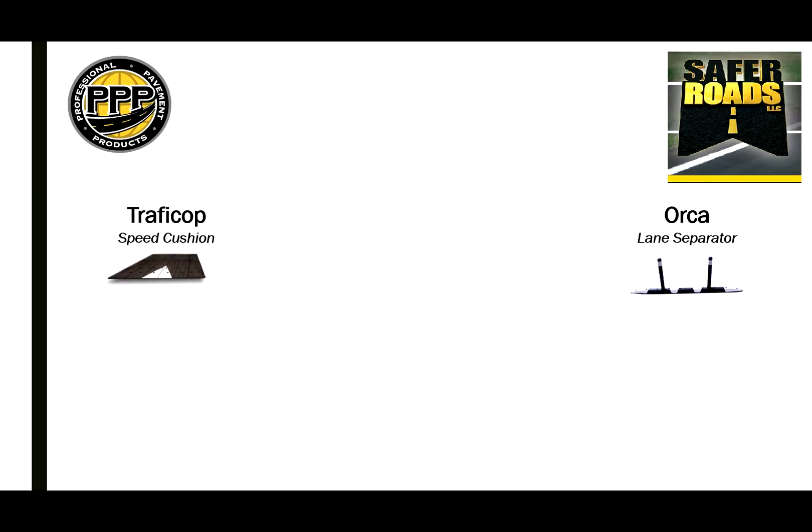Safer Roads has 3 primary products within its line: the Traficop Speed Cushion, the Orca Lane Separator, and the RediPave Modular Median. Although these 3 products serve very different purposes, they do have 6 things in common.

First is that they're all modular, meaning that they're versatile and easy to transport and install. Secondly, they are all made of 100% recycled rubber buffings, improving the durability, wear, and safety.

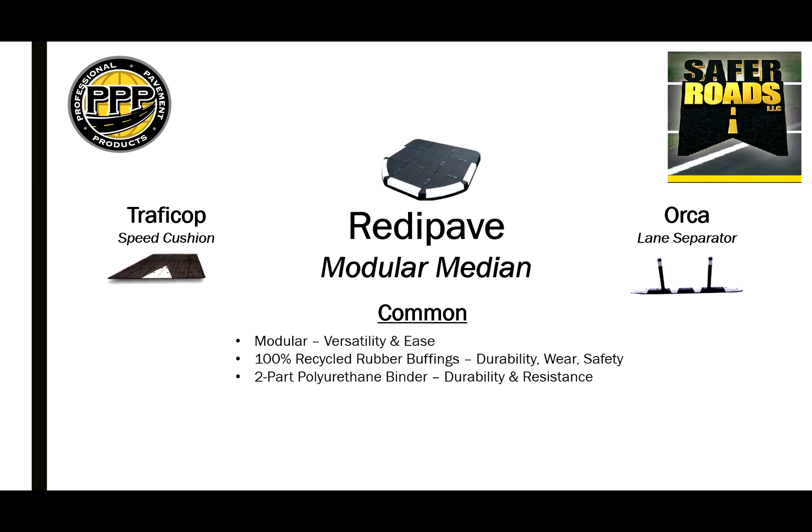Something worth noting here is that these are not made of crumb rubber from recycled vehicular tires. They are actually made exclusively from the far more durable and less caustic tread of truck tires. This rubber is then blended and permanently bound by a 2-part polyurethane binder, again improving its durability and resistance to weather, wear, and chemicals that exist in the roadway system.

Next, this mix is compacted by a 160-ton press, again improving its durability and the density of the module.

All Safer Roads modular products are anchored with a stainless steel anchoring system that holds the modules in place for longer durability and ease of installation. Lastly, a quick-set polyester resin is used in the anchoring system to prevent vibratory crawl-out of the anchors as seen in many other products. The resin also provides a seal, preventing water intrusion into the pavement base, providing durability, stability, and a longer useful life.

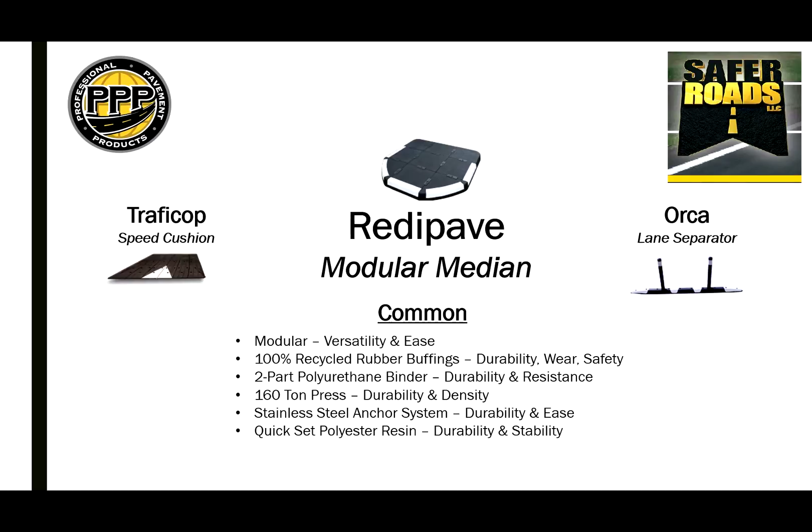Although the modular median has been used in Europe for several years, it was just introduced to the US market in late 2016 on a project in New York City.

So how can we stand behind the statement of durability? We can do this by examining the durability of its sister product, the Traficop, that has been sold in the United States for over a dozen years.

The first image is of the Traficop Speed Cushion that was installed in Margate, Florida. This picture was taken after 12 years of use.

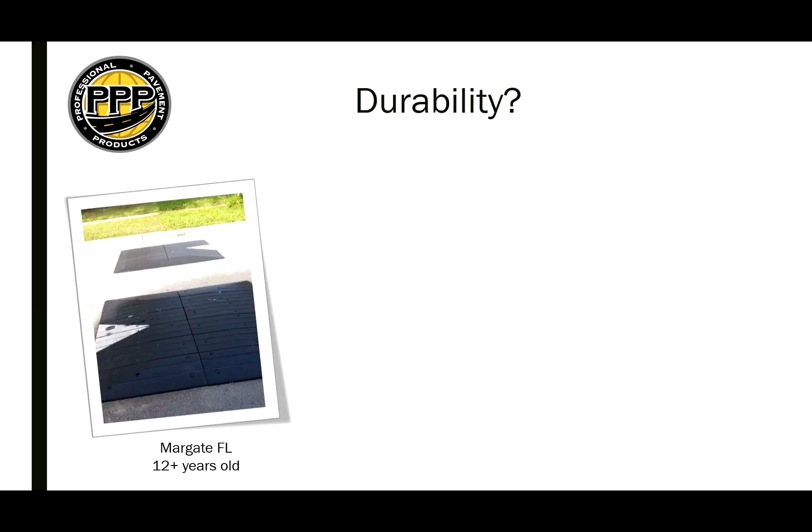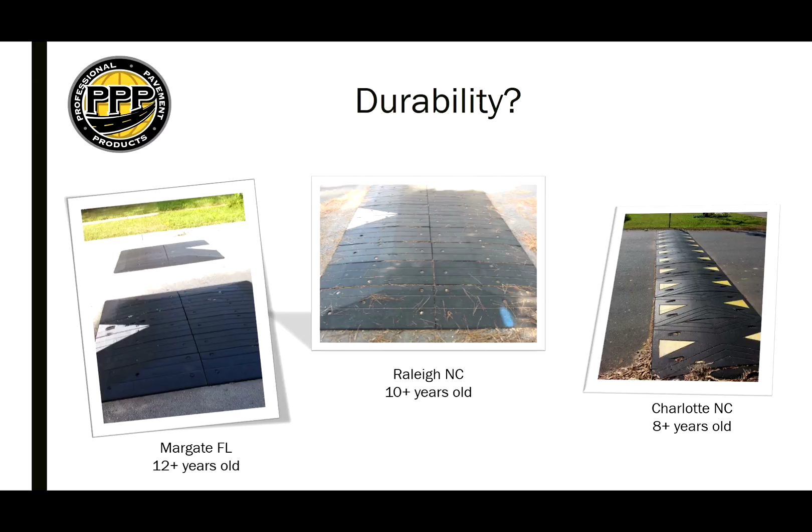Next is the installation in Raleigh, North Carolina from 10 years ago. And this is the Traficop installed 8 years ago outside of Charlotte, North Carolina.

I want to zoom in on this image for 2 reasons. First, notice the lack of wear on the surface and even on the markings after so many years of vehicular impact and weathering. Second, note the seam in the middle.

See how straight it is? Other products of this type tend to shift under the constant impacts. As a result, the center seam would become distorted.

As you can see here, after so many years, the Safer Roads installation process and hardware prevented this from being a problem, providing for a long, effective life of all of its products.

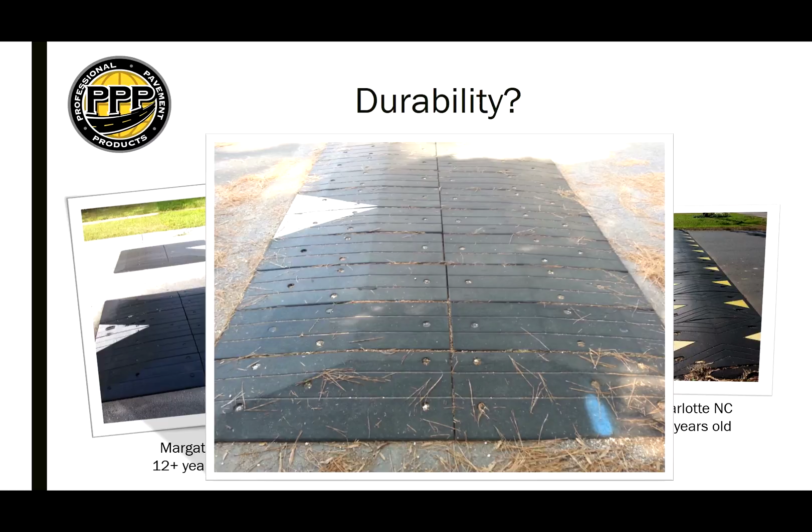Now let's look at the star of our study, the modular median. There are two primary purposes of the modular median. First is to build an effective, durable, permanent, or seasonal median rapidly. Second is to improve the safety and protection of pedestrians, motorists, and even cyclists.

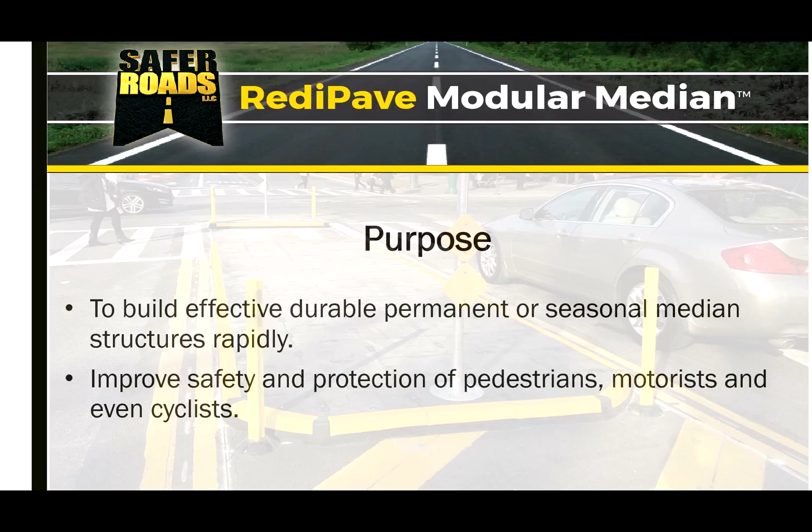As previously stated, the modular median begins with recycled rubber buffings, then with a two-part polyurethane binder, and compressed with 160 tons of pressure, creating the modules. These modules of different types are then assembled together, creating a complete median in a matter of minutes.

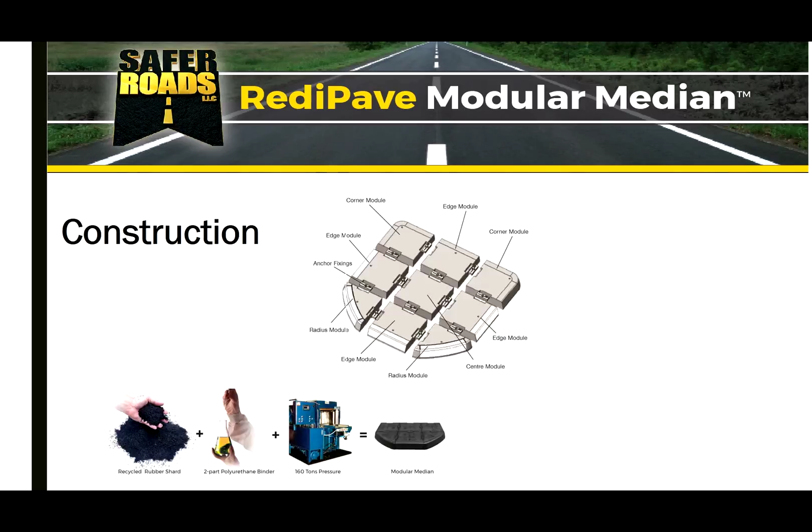The modules are fastened together into the pavement by the use of a durable polymer anchor block held down by stainless steel bolts into the exclusive RediPlug pavement anchor, providing a safe, secure device for managing your traffic and protecting your pedestrians.

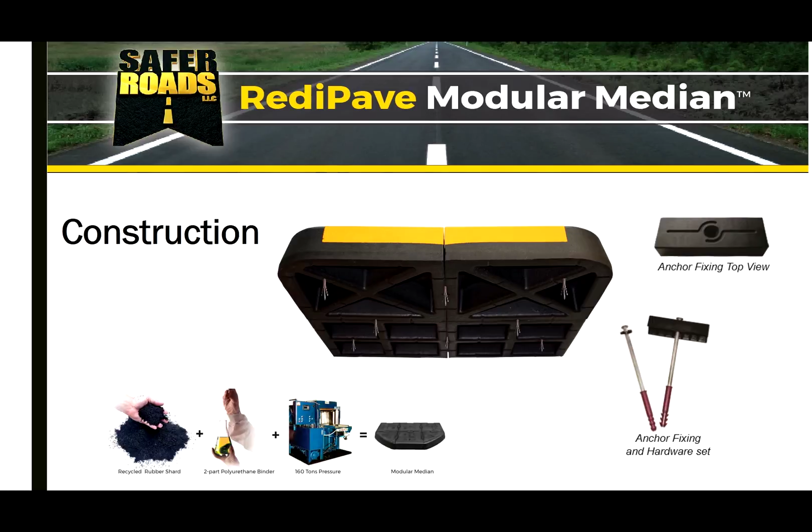All right, now let's move to our 3 case studies. First is the New York City Department of Transportation.

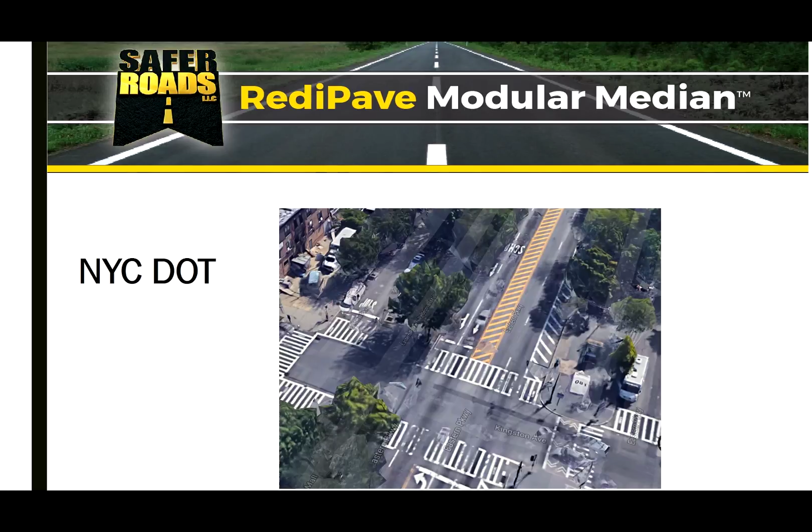In this case, the need was to provide a pedestrian refuge on this multi-lane roadway. But here's the hook. This roadway is also on the route of one of the largest parades in the United States, the New York City Labor Day Parade.

Their goal was to create a pedestrian refuge that first would be durable and effective throughout the entire year, even the winter months of plowing, but second, to be easily removed and then reinstalled before and after the parade. This was the first time that RediPave modular median would be used in the United States.

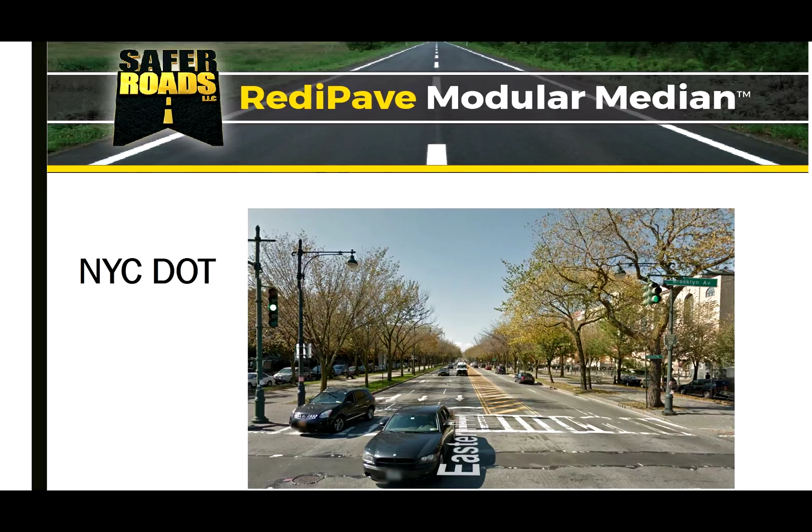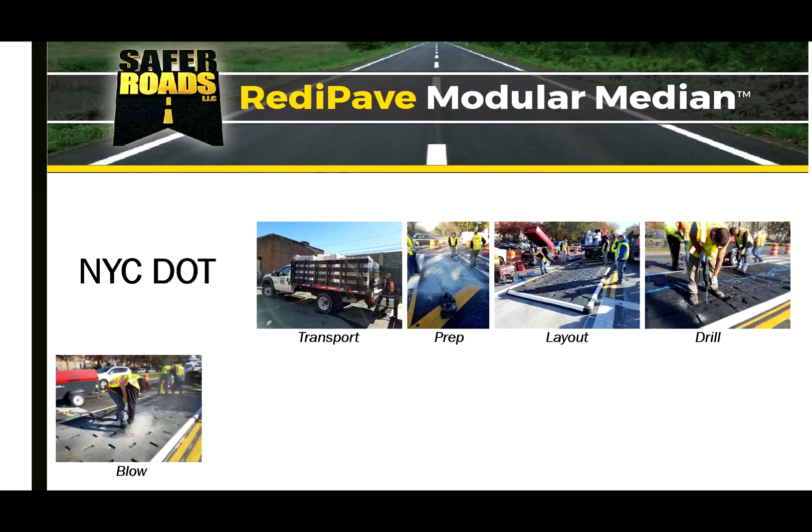The RediPave modules and hardware for 2 large pedestrian refuges were loaded and transported on a single stake bed truck. We prepared the surface by sweeping and ensuring a relatively flat surface. Then we laid out the median modules and drilled the anchor holes, blew the debris out of those holes, installed the resin, and set and drove the anchors.

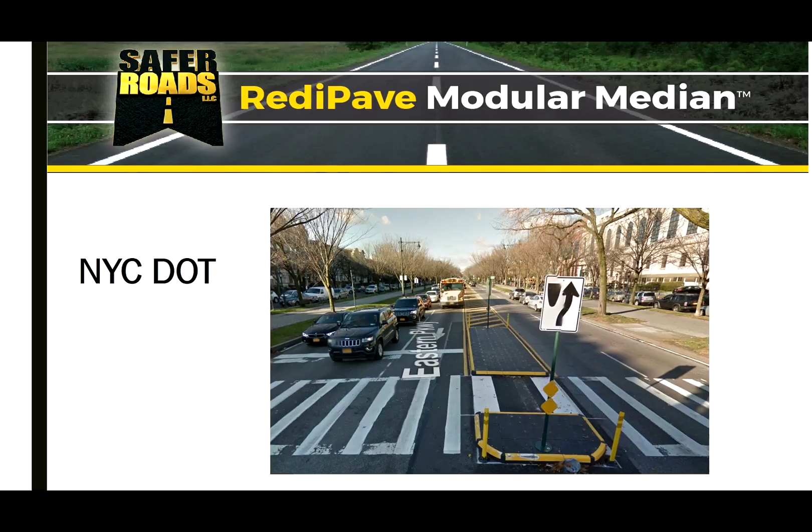And in only a few hours, we went from this to this. On this project, we were able to install this 2-piece 26-foot by 8-foot median in less than 4.5 hours.

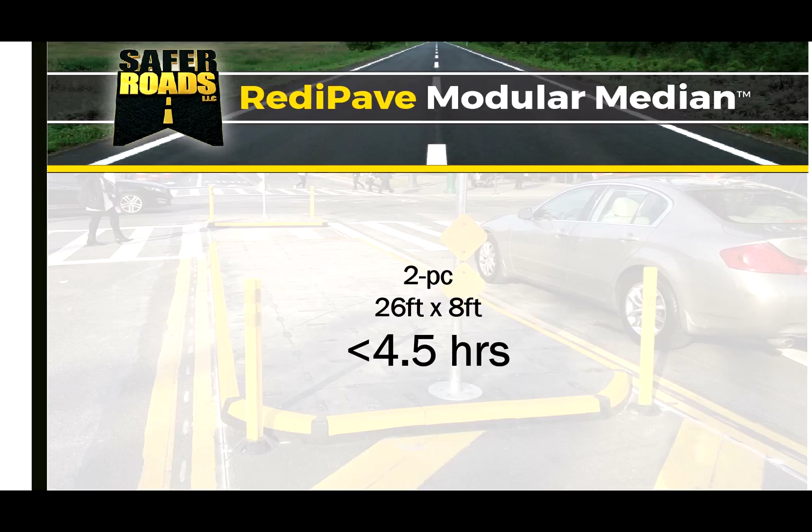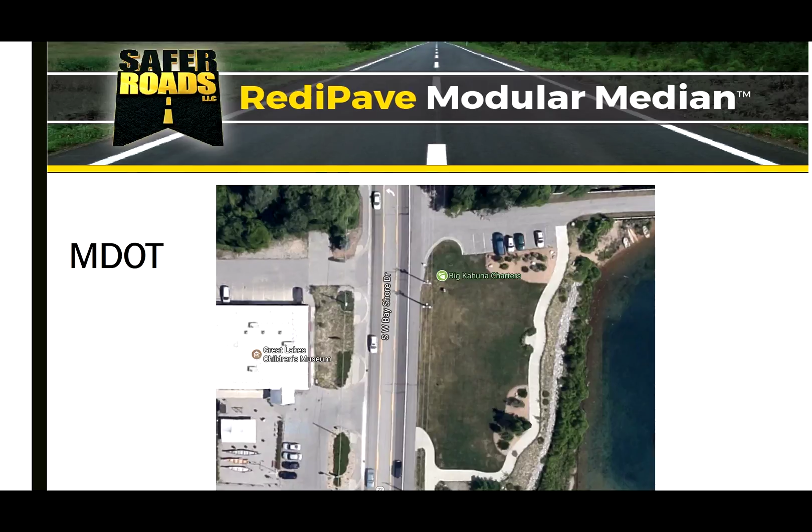Next was Michigan DOT. Here they had a multiple lane roadway in front of a children's museum across from a public park. There was concern of the children and their parents crossing the multi-lane roadway to go from the park to the museum and back. This is a major route in Michigan and is normally plowed at high speed in the wintertime. Building a conventional concrete median was not possible due to the concern of damage to and by the plows.

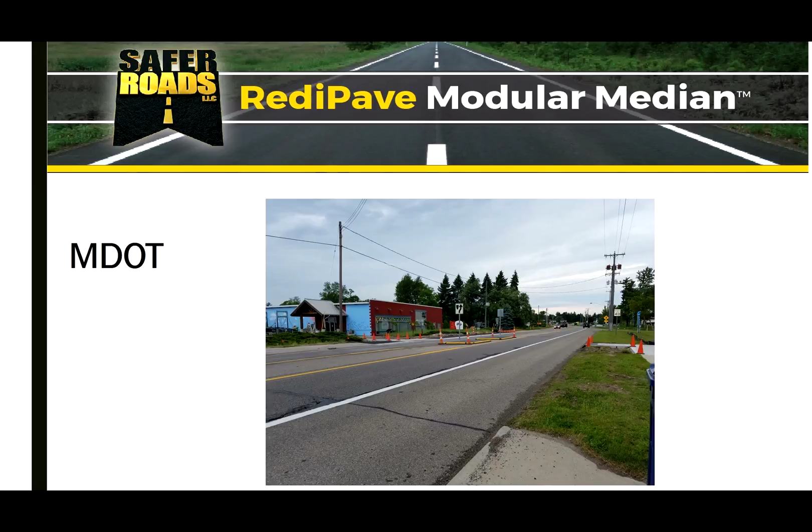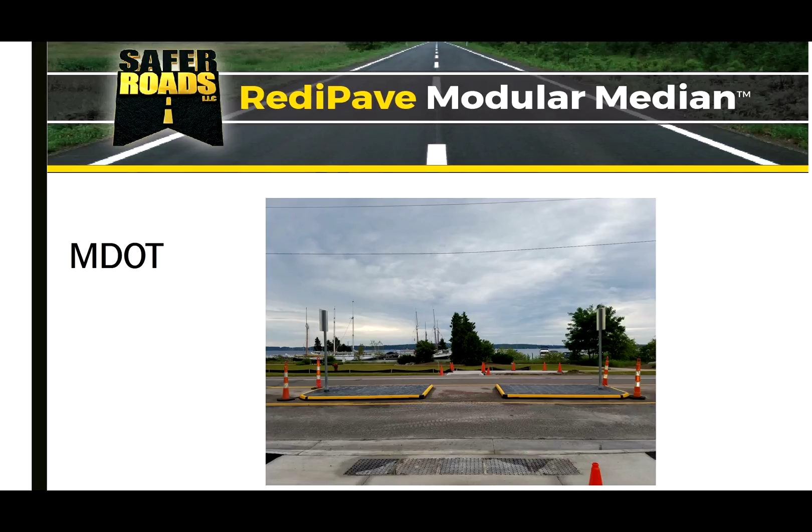It was decided to use the RediPave modular median as a seasonal mid-block pedestrian refuge. This way, it could be put in place during the tourist season and then removed for plow season. The installation and its effectiveness was a complete success. Now the parents and their children can safely cross the multi-lane road without playing a deadly game of Frogger.

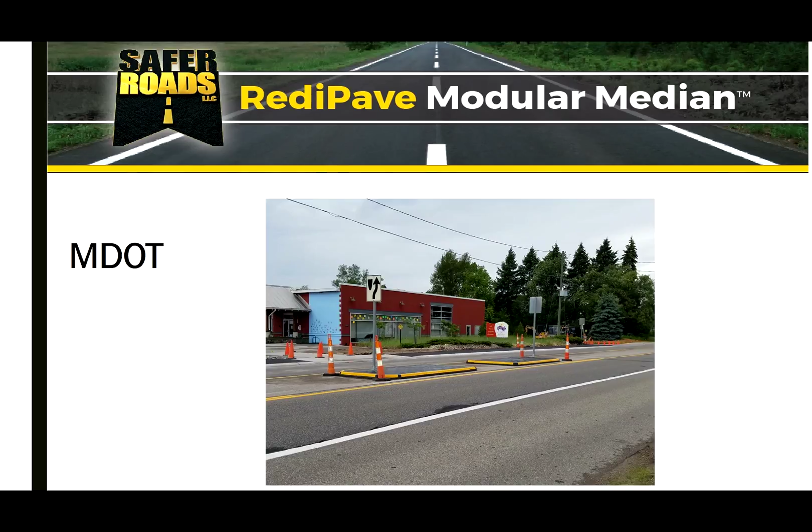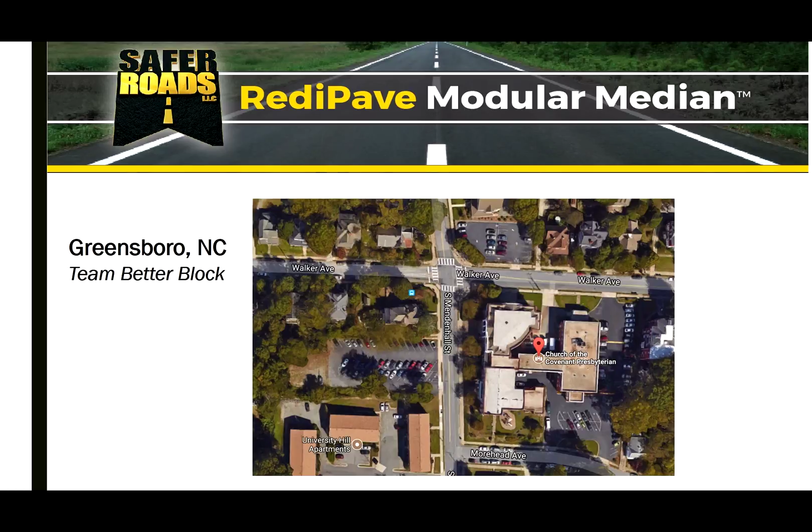The third mini case study took place in Greensboro, North Carolina, through an organization of Team Better Block. Team Better Block is dedicated to reclaiming cities for the public good, one block at a time. On this project, Team Better Block utilized a number of Safer Roads and Alert Brands products in an effort to bring traffic speeds in compliance and to create a more pedestrian-friendly environment in this university area.

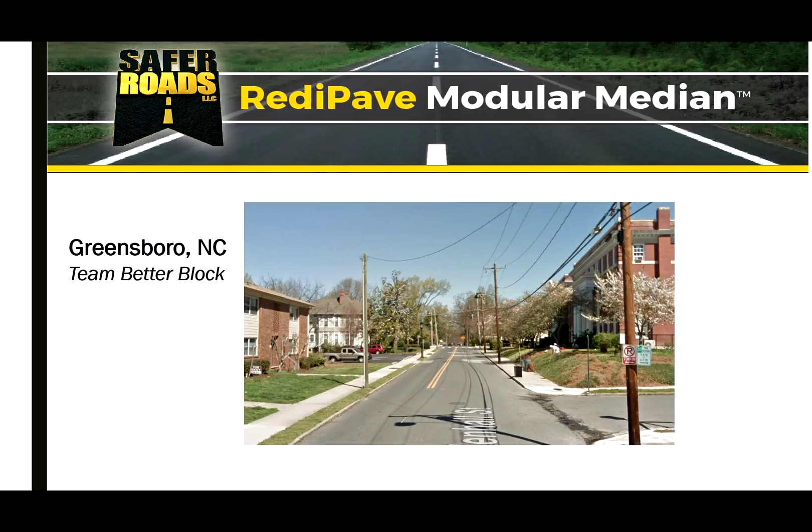Using the Safer Roads and Alert Brand line solutions, including the Alert Brands Median Alert and Flexible Delineator Post, and the RediPave Splitter and Modular Medians, all to create pedestrian refuges, traffic management chicanes, and chokers. Post-study results show an impressive 95% speed compliance.

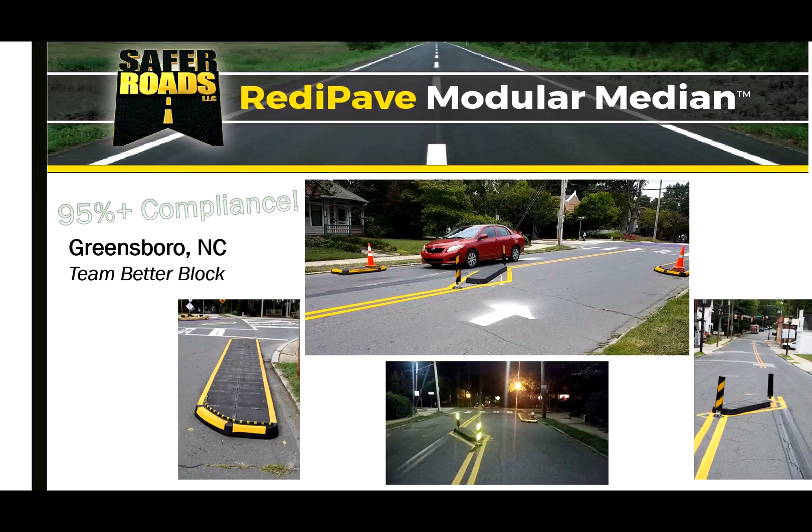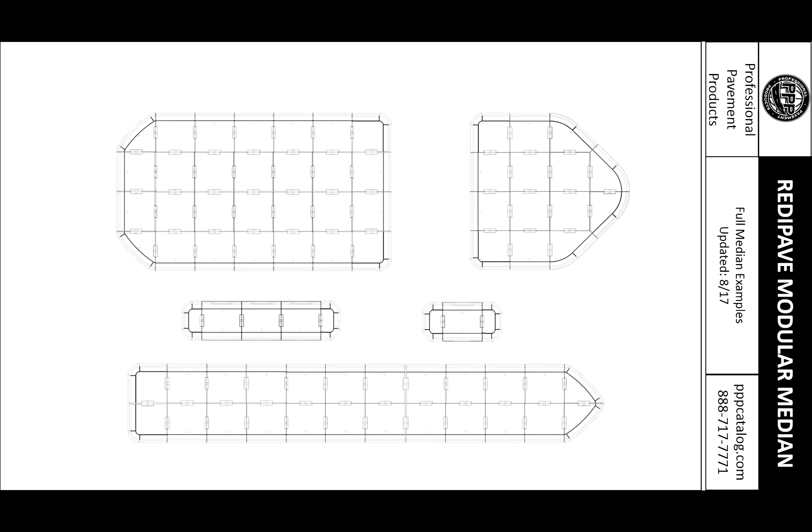The RediPave, being a modular device, provides for many configuration choices and designs. The RediPave modular median and splitter come in 9 module types, such as edges, corners, centers, radiuses, and more. These modules are combined to create full medians of various widths and lengths.

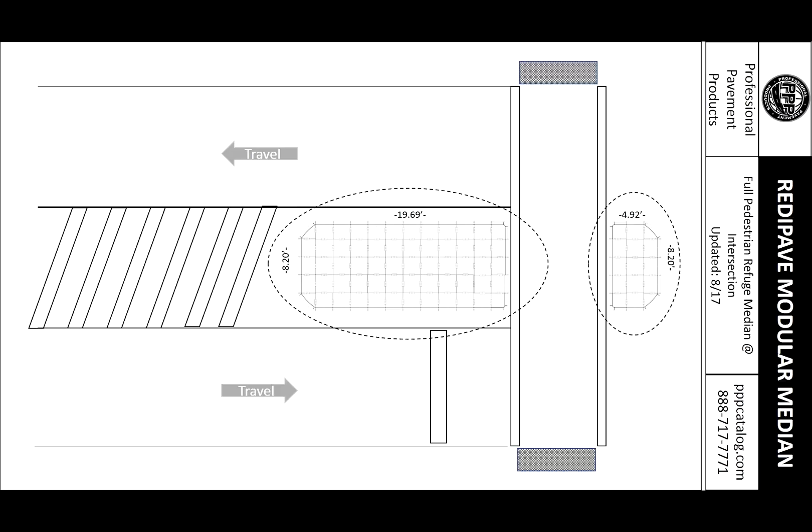Various styles of median end treatments, small medians and roundabout centers, and parking and pedestrian bulb outs, just to name a few. These configurations provide an agency with a list of design options, like an intersection full pedestrian refuge and median, a pedestrian curb extension or bulb out, a parking curb extension or bulb out, a 2-lane slow point or a choke, a traffic diverter or chicane, a mini pedestrian refuge for narrow roads.

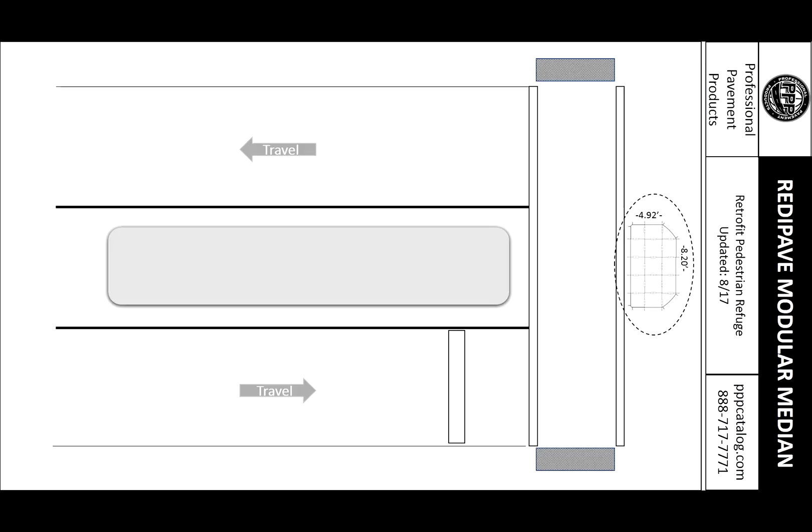A retrofit pedestrian refuge placed above the existing median, a median extension to an existing median, a mid-block pedestrian refuge, which is a widely growing pedestrian protection countermeasure.

There are many advantages to using the RediPave modular median over conventional paved medians. For instance, equipment. There's no heavy equipment required, no real specialty equipment, and most of the equipment is something that the agencies already have on hand. And it can all be transported on a single 1-ton truck.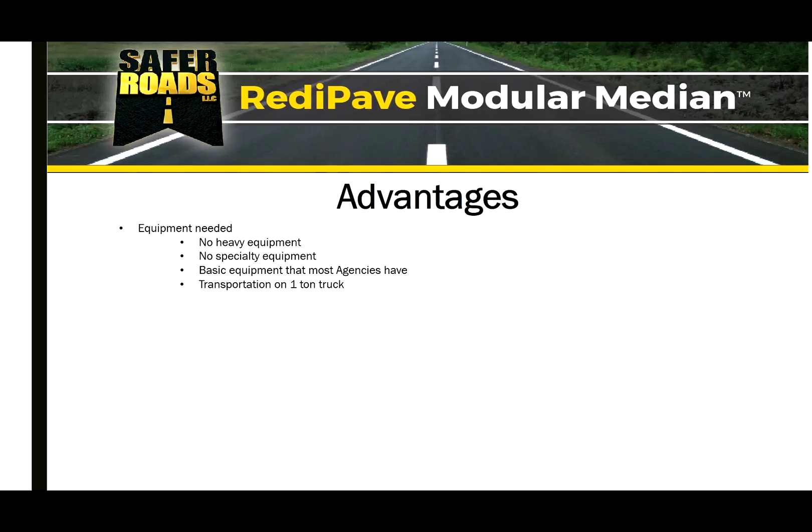Expertise - there's no special training or craftsmanship required. Speed of installation - it takes hours, not days, less traffic disruption and labor cost. Material cost runs around $35 to $45 a square foot. It's removable for both seasonal purposes, for overlay and other needs. And it can be custom designed. Multiple modules can be assembled in many different configurations, as we showed previously.

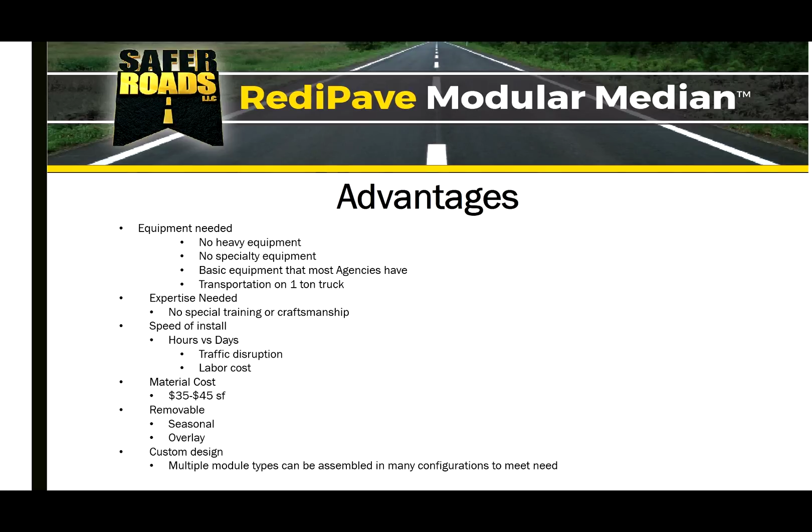The RediPave modular median is relatively simple to install. Provided is a list of equipment, tools, and a simple list of common issues. As mentioned earlier, the modular median can be installed in a matter of a few hours. But there are a few issues that can slow up the installation, like these shown here.

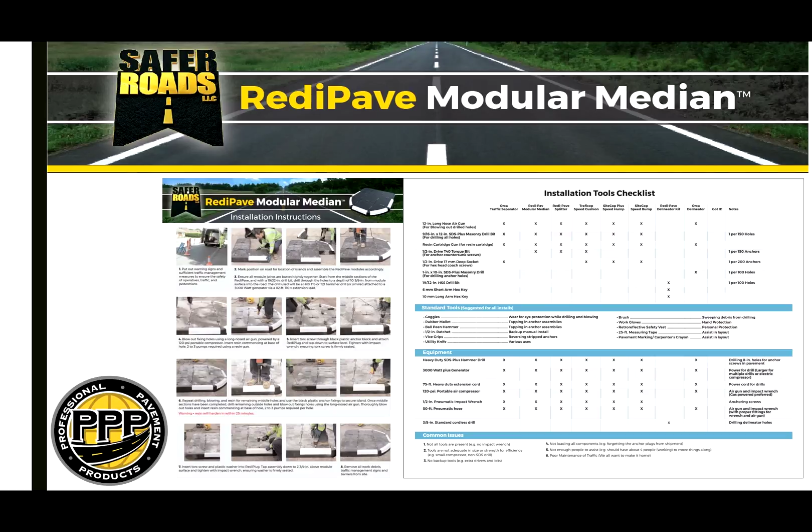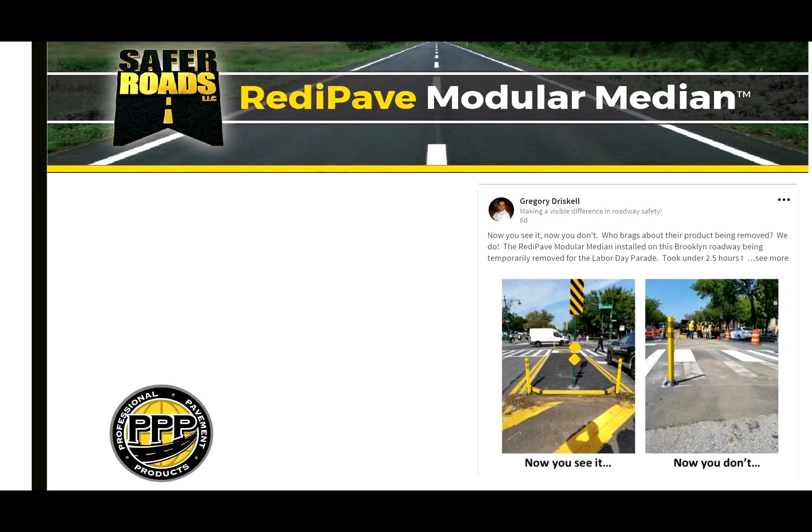Lastly, remember that New York City study? Here's the latest update on the installation. How many companies have products that they brag about being uninstalled? Well, we do. With the RediPave modular median, this uninstall took less than 2.5 hours and only about another 3 hours to install it after the parade.